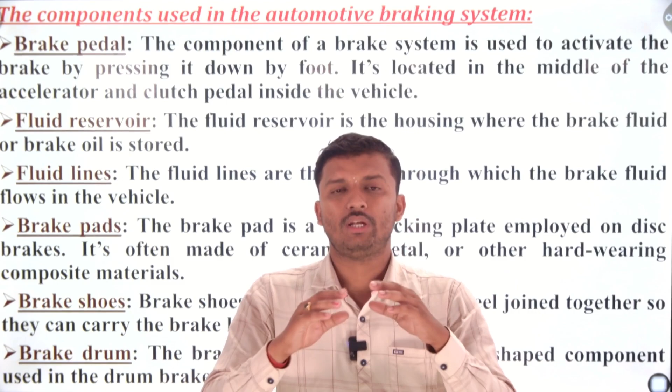Next is the brake shoe. There are two pieces of steel joined together that carry the brake lining in it. The brake shoe is just like a horseshoe type in the drum system. In a hydraulic brake, it is just like a piston type, or in the disc system it is also piston type. But in a mechanical braking system, generally the drum brake system, the brake shoe is just like a horseshoe type, in which there is a brake lining or friction pad that attaches to the axle of the wheel to stop the vehicle. That is known as the brake shoe.

The brake shoe is connected by means of the braking system lining, and that brake shoe contains the brake lining or friction lining on it. When the brake is pressed, the brake shoe comes into contact with the axle, the brake lining connects to the axle, and the speed of the vehicle is reduced. When the brake is released, it moves away from the axle and the vehicle returns to forward motion.

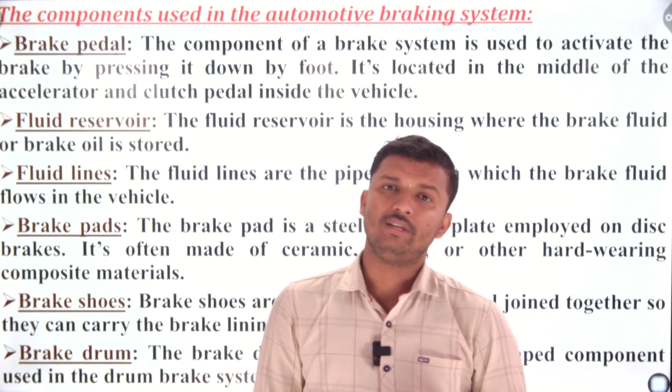Brake drum. The brake drum is a drum attached by means of the axle. When the axle rotates, the brake drum rotates. It is a drum shaped component used in the drum brake system. In a drum brake system there is a brake shoe, a brake drum, and also brake lining or friction lining present. Brake lining is otherwise known as friction lining, and it is only there in the drum brake type system.

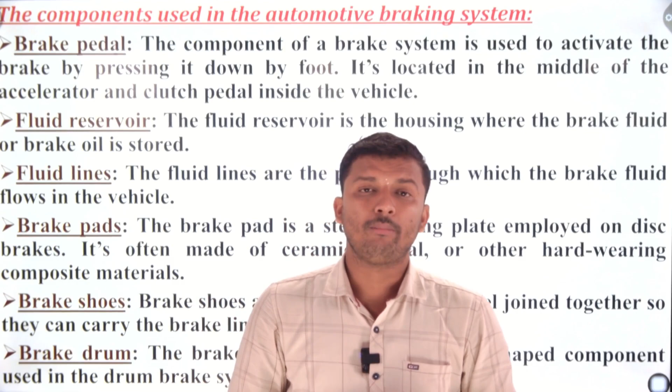I will now explain the fluid reservoir, fluid line, which is present in the hydraulic braking system. The brake pedal is common for all braking systems, whereas the brake shoe, brake drum, and brake pads are there in hydraulic systems, and the brake shoe and brake drum are present in the mechanical brake system. In the further part, there are also different components.

The next part of the braking system component is the rotor. The rotor is a cast iron brake disc, meaning the material the rotor is made up of, connected to a wheel or axle, sometimes made up of reinforced carbon-carbon, ceramic matrix or some other composite. The rotor is a brake disc connected to a wheel or axle.

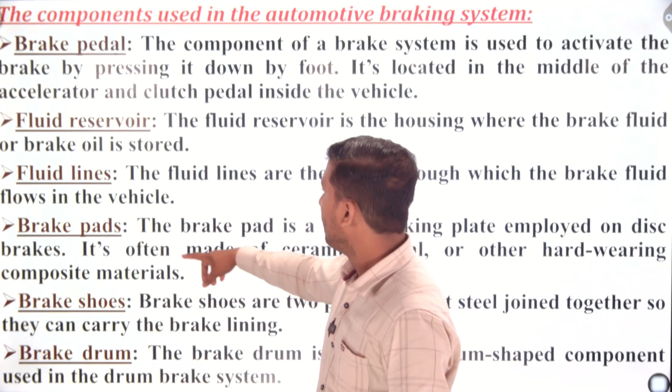What happens in a disc braking system? First there is a rotor, and after the rotor there is a drum type, a disc drum type. As explained previously, there is a brake pad, which is arranged by means of a rotor. There is a rotor and a brake drum, connected by means of the axle. When the axle rotates, the rotor rotates, the drum rotates, the brake pad rotates, the brake lining and brake shoe rotate, along with the fluid reservoir.

In the fluid reservoir of the hydraulic system, generally in the disc system, what happens is: the rotor is there, connected by means of the brake pad, the brake pad connected by means of the fluid reservoir, the fluid containing the brake cylinder type, piston type, which is the brake shoe type. In the brake shoe type, the linings are fixed over it, and the braking system is arranged and connected.

Next is brake lining, otherwise known as the friction lining or friction part of the brake shoe, which is a heat resistant type. Heat resistance means it is the part of the braking system which is directly attached to the axle of the wheel, and this attachment increases the heat in the system. The maximum amount of heat generated is absorbed by means of the brake lining.

It is a very soft but also tough material with high friction characteristics, enclosed inside the brake shoe or the lining on the brake shoe. This means it controls and absorbs the heat that is produced during the connection of the wheel to the brake axle by means of the brake shoe.

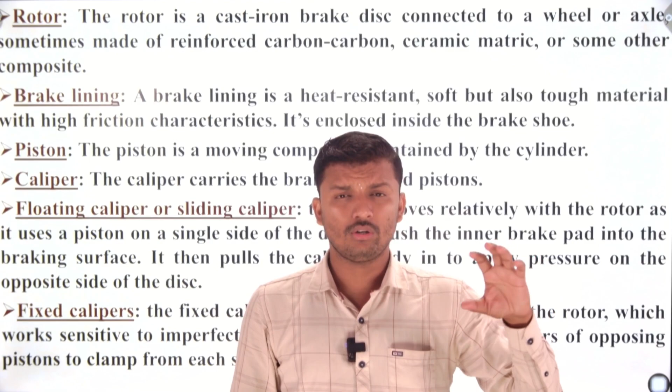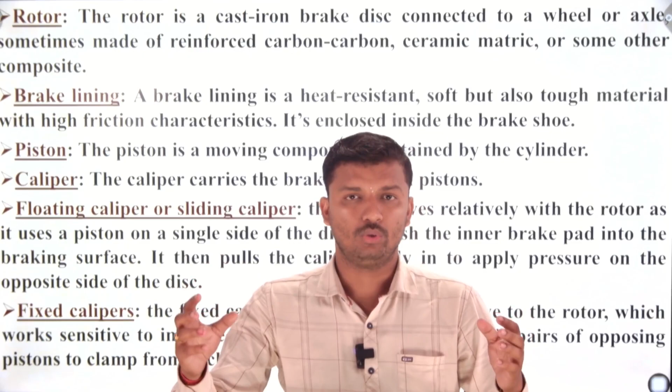What happens in a floating slide? Floating means it just changes motion by means of the motion of the rotor. The respective caliper rotation or movement depends upon the rotor movement. The rotor movement with respect to the caliper movement is arranged in such a way that it just encloses or discloses the brake system during the time of need. That is why it is known as a floating caliper or sliding caliper.

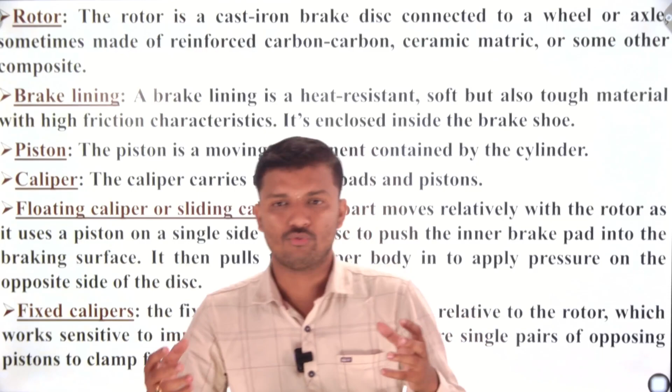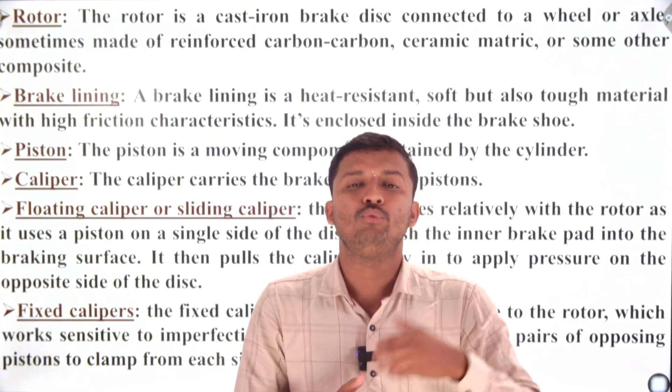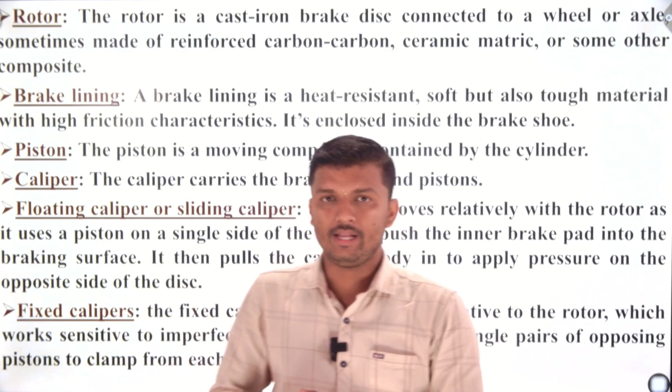But a fixed caliper is one that, with respect to the rotor motion, does not get rotated with the rotor motion, which works as a single pair of opposing piston clamps for each side. That means it is a single pair opposite system, whereas the floating caliper is used for a double part - when a double disc type system is used in the hydraulic system, the floating caliper is used. When you require a one-side braking system, we use the fixed caliper. The fixed caliper name comes because it never rotates or changes its movement with respect to the rotation of the rotor. Next, the next components of the braking system are the master cylinder and the vacuum booster.

Master cylinder - what does it do? The master cylinder converts the non-hydraulic pressure from the driver's foot into hydraulic pressure. That means when a vehicle driver pushes the brake pedal, the working of the master cylinder is to convert that pressure, the non-hydraulic pressure, because there is no fluid at that time, into hydraulic pressure which is transmitted to the fluid.

This means the master cylinder is only present in that type of braking system where there is a hydraulic braking system or disc brake system used. So, when the brake pedal is pushed by the driver, that force is converted into hydraulic pressure and transmitted to the fluid reservoir through the fluid line to the brake shoe and brake lining, brake drum, and finally to the brake lining to connect, engage or disengage the brake.

That is the way the master cylinder works. It is controlled by the slave cylinder at the opposite end of the hydraulic system. This hydraulic system is generally used in two parts: in a disc system and also in a hydraulic system.

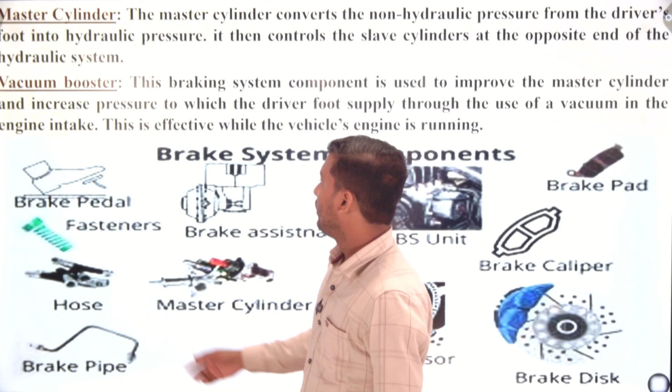This is the brake pedal, where the driver first pushes it. It is on the outer side, between the clutch and the accelerator. This one is fasteners. Fasteners mean anything that connects two individual components together. That is what is known as fasteners.

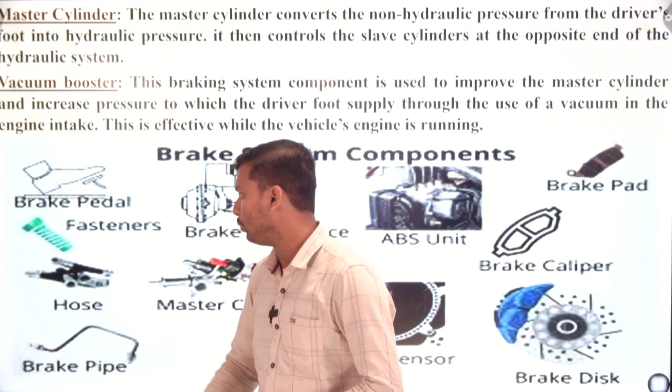Then there is the hose. Hose means where there is connectivity of the fluid. When there is a hydraulic system, there is a hose through which the fluid flows through the brake pipe. This is the brake pipe, or brake line, or fluid line, where the fluid moves or is supplied in the hydraulic system.

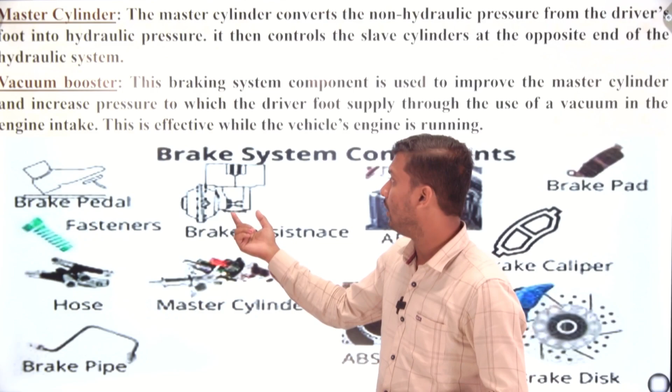Next, this is the brake assistance. When the brake fails at times, the function of this brake assistance is to maintain the effectiveness of the brake during the time of brake failure.

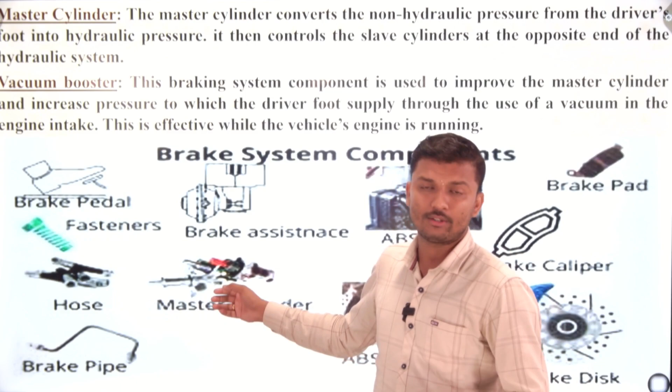Next is the master cylinder, which I already discussed. This is the master cylinder here. How does it work? I already discussed this. It works to convert the non-hydraulic pressure into hydraulic pressure and to increase the effectiveness of the braking system.

Next is ABS, or brake caliper. I will discuss this ABS next. This is the latest version of the brake system.

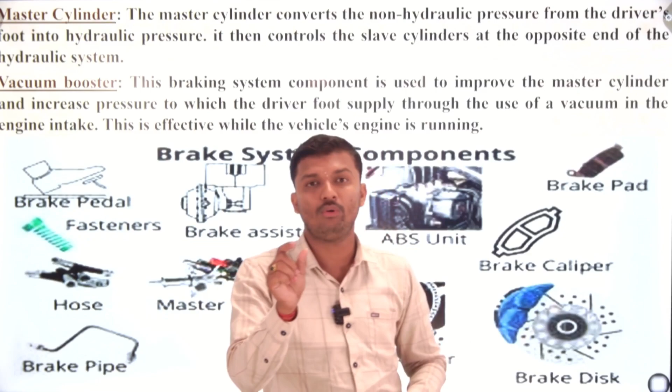This is the brake pad. What happens in the brake pad? It contains the piston in the hydraulic braking system. It contains the piston as well as the caliper. The brake caliper and the piston are connected by means of this brake pad.

This is the brake caliper, the floating caliper I already discussed. There is a floating caliper and a fixed caliper; by means of the rotor it rotates, or by the rotor it gets fixed. It is used in one-sided or two-sided braking systems, and it gets adjusted or assembled with the help of this brake pad. Over this brake pad there is a brake lining, a brake shoe, and even the brake lining.

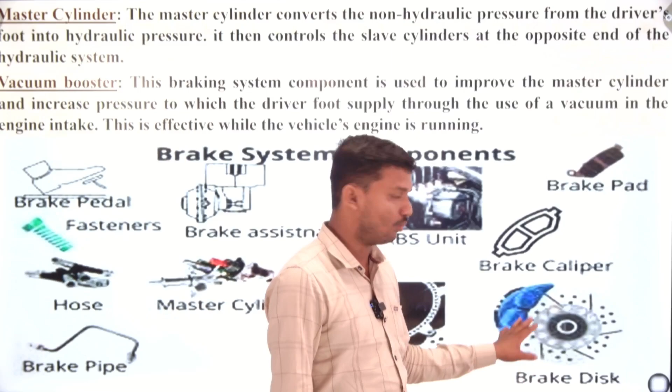Then this is the brake disc. Later, when I discuss each type of braking system in detail, I will explain how this disc brake system works. This is a complete disc, the disc system. This one is a drum. The inner part is the drum, the outer part is the disc.

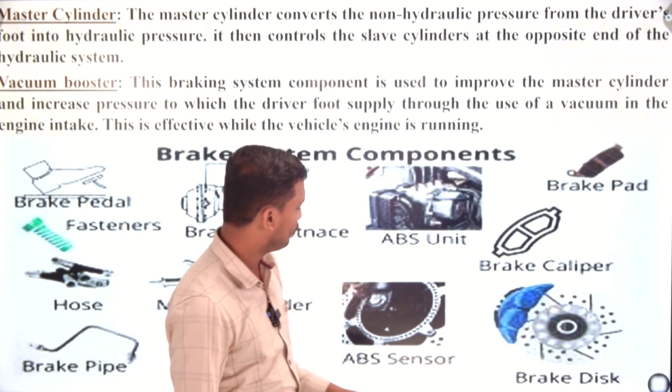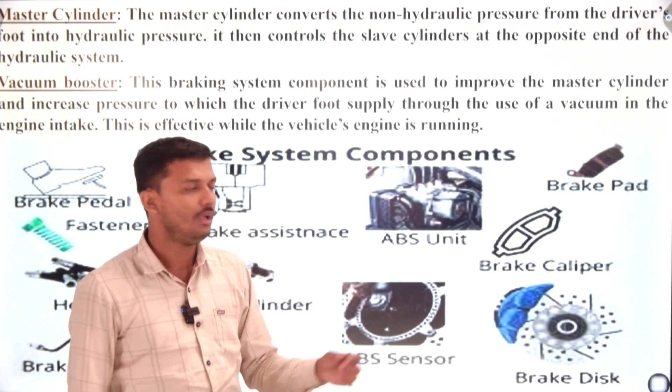This one, the ABS sensor and ABS unit, is the latest part of the braking system. Earlier the ABS system was not used, but in modern vehicle development, this ABS plays a very important role. It is the anti-lock braking system. The ABS full form means anti-lock braking system unit and anti-lock braking system sensor.

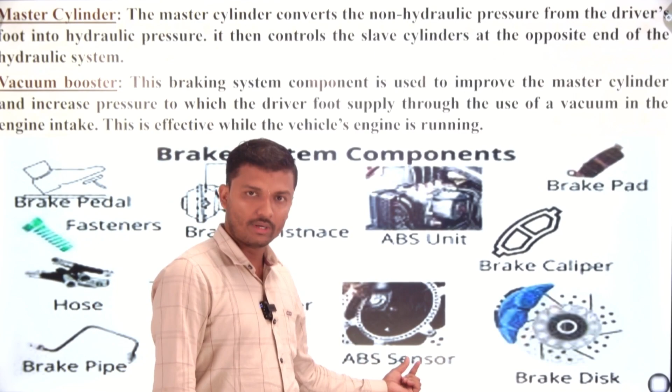It works as an electrical sensor as well as mechanically. The ABS sensor acts electrically, giving sensing input into the ABS unit, and the ABS unit works mechanically. This is the electrical and mechanical interdependency in the braking system, which I will discuss during the explanation of the types of braking systems, where I will explain the ABS system in detail.

Up to now, you should understand ABS is an effective braking system where no skidding takes place. It just controls the steering, braking, and skidding. These three things get controlled and managed effectively by this new development of ABS unit and sensor.

Next, there is a diagram of the braking system. This one is the vehicle axle. There are four axles. In the axle, there is the lining where the brake system acts. This red color shows where the braking system acts.

One thing you should remember: the braking system should always act on the brake axle, not on the tires. The tires are not connected by means of any braking system. The braking system is always attached to the axle. When the axle stops, automatically the tire also stops rotation, because on the axle there is a wheel, and over the wheel there are tires.

So what happened here? This one is the master cylinder. The master cylinder works to enhance the pressure from the brake pedal.

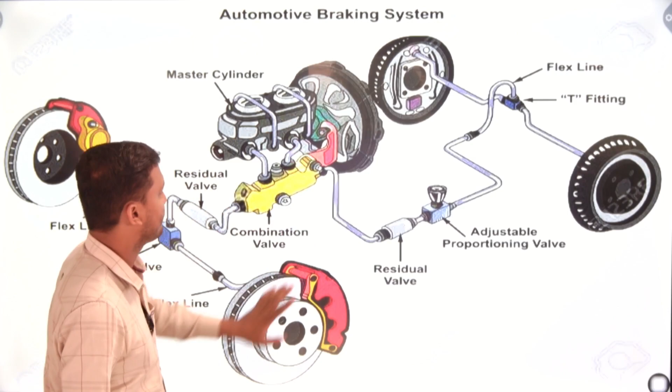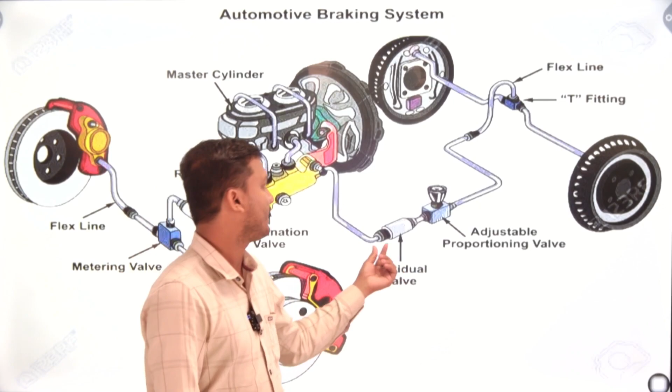From the master cylinder, the fluid gets transferred backward by means of the residual valve and adjustable proportioning valve. According to this, fluid gets transmitted into the wheel through the master cylinder by means of the residual and adjustable proportioning valve. This means when there is a returning of the fluid after disengaging the brake, this residual valve contains or returns the fluid. That's why it is called the residual valve.

Next, from this backward point, the fluid line transmits the fluid. In the rear wheel, there is a flex lining or T joint, a T fitting, which is a flex line where the fluid gets transmitted into the rear wheel of the vehicle. In the front wheel, similarly, there is a combination valve and residual valve. In both, the residual valve controls the flow of the fluid.

Next, there is a metering valve. The metering valve controls the amount of fluid transmitted into the two axles similarly. That means the amount of braking should be equally placed or equally effective at both wheels.

It does not mean the left wheel will brake fast while the right wheel brakes one or two seconds later. No, in the braking system, the wheels should get stopped simultaneously, all four wheels should be stopped. If you apply the full braking system, all four wheels stop directly. Or if you want to stop just the front axle, both wheels of that axle should stop simultaneously; similarly for the rear axle. That is the system. In the braking system, the metering valve plays an important role.

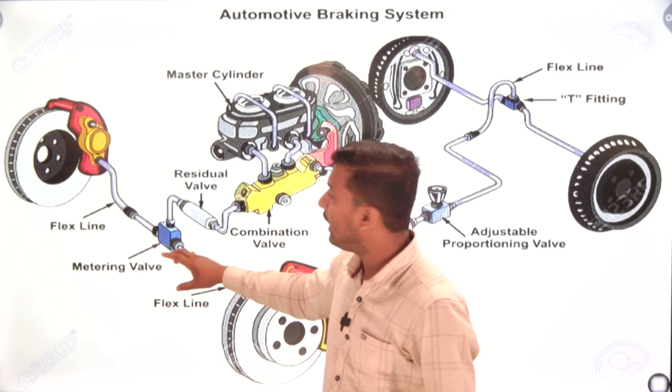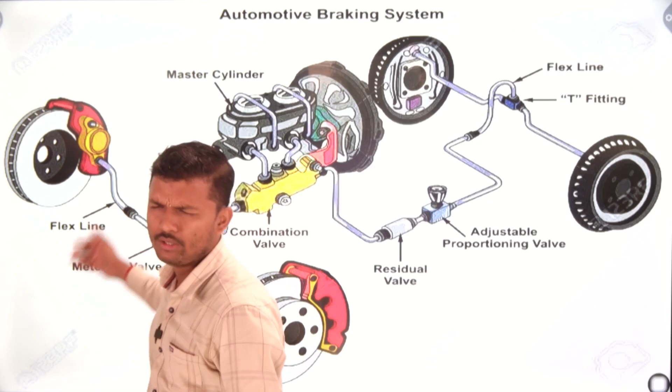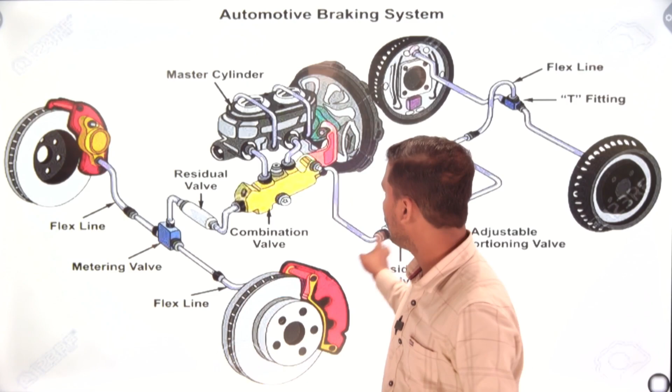In further classes, I will discuss each and every braking system in detail: mechanical, hydraulic, air, servo, vacuum, disc, and anti-lock braking system. Each and every brake system will be discussed in detail in the next class. For that purpose, watch my video for the further classes.

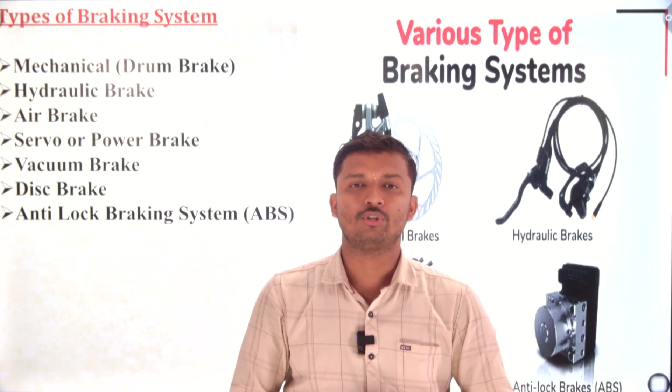I will start the braking system with the mechanical drum braking system. This mechanical drum braking system I will cover in the next classes. Up to here, thank you very much.